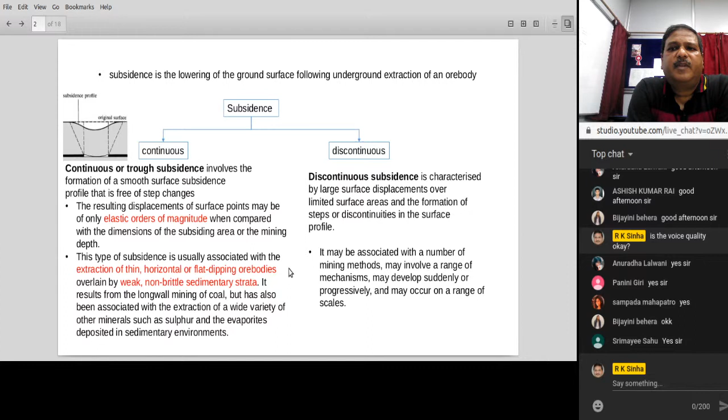That causes subsidence. So subsidence can be divided into two parts: one is continuous subsidence, and another is discontinuous subsidence.

Continuous subsidence occurs mostly in flat deposits, and the displacements are very less, sometimes in the elastic order of magnitude. Elastic order of magnitude means the subsidence up to the surface is showing a depression, but it is not breaking onto the surface, whereas underground it may have broken.

It is mostly associated with the extraction of thin horizontal or flat dipping ore bodies, which are overlain by weak, non-brittle sedimentary strata. On the other hand, discontinuous subsidence is a change in the...

It is characterized by large surface displacements over a limited surface area and the formation of steps or discontinuities in the surface profile. These kinds of discontinuous subsidence occur mainly in metalliferous mining deposits, where the deposits are almost vertical or subvertical.

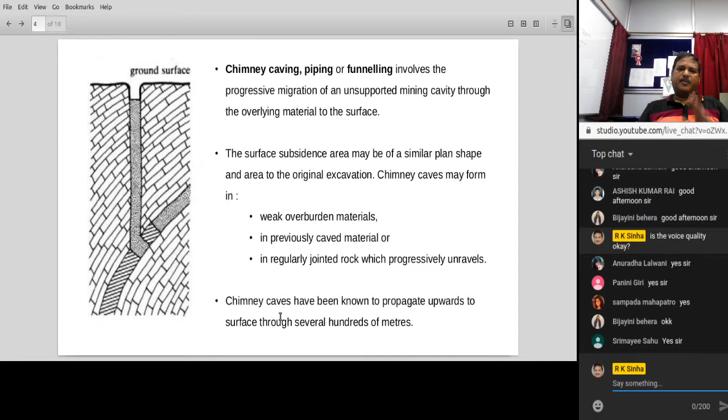Another kind of chimney subsidence is also known as plug subsidence. What happens is you have a mining deposit, you are mining at the bottom, and a certain portion of the strata is engulfed between two cross dikes. The moment you release the material from the bottom, this whole section can shift into the excavated area and come down just like a plug.

This type of subsidence is known as plug subsidence. One typical example is from Athens Mine in northern Michigan, where the cave developed and rapidly progressed to the surface through 600 meters of cover. In 1932 this plug caving occurred, and later people started monitoring it. After this dike issue there was no further subsidence there. This can typically happen when you get dikes in metalliferous deposits.

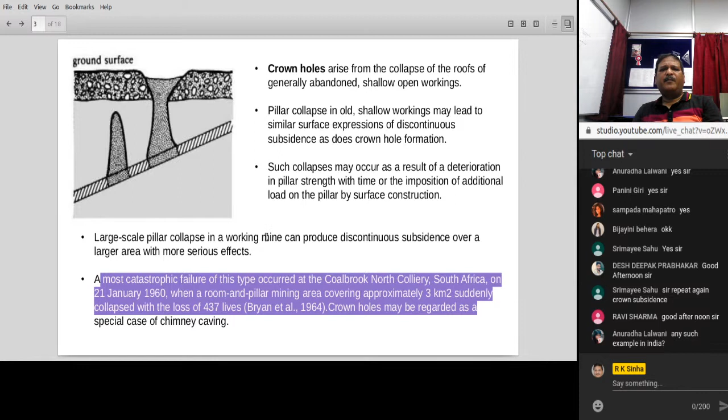One example is from Coalbrook North Colliery in South Africa, where room and pillar mining covering approximately 3 square kilometers suddenly collapsed with loss of 437 people. These can also be treated as a special case of chimney caving, because a certain weak zone of strata is involved. In Indian coal mines, you get a few crown hole type subsidence cases, termed pothole subsidence in the Indian scenario. Some 30 to 40 mines at shallow depth have reported this in India also.

When plug subsidence and crown pillar or chimney caving subsidence were being studied, a lot of research was carried out in 1994 by Bétourney, who reported the analysis between the stope span, rock mass cohesion, and factor of safety. The width of stope span is denoted by L. They came out with guidelines for the best span of the stope for a given factor of safety. For example, if your rock mass cohesion is 0.14 MPa, and you want a factor of safety against chimney caving of 1.5.

So from 1.5 you draw a horizontal line going up to the curve, and from there you drop a vertical line, so it comes out to be 10 meters. So a stope span of 10 meter width will be sufficient to prevent chimney caving against a factor of safety of 1.5.

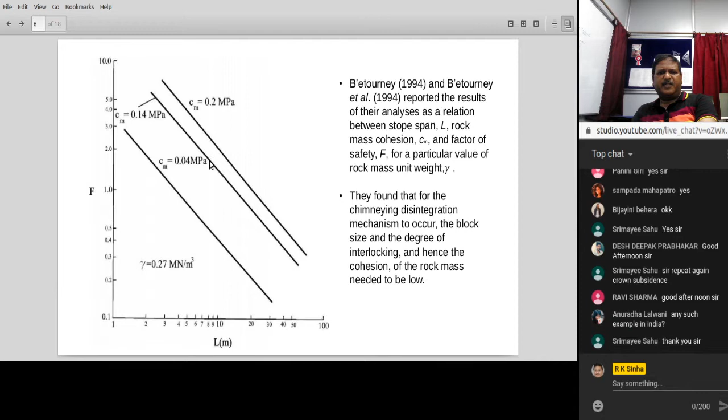But this relation has been developed for another country, for Michigan. So for Indian conditions these things need to be developed. So far there is no guideline, but it can be tried, and to some extent it can work in Indian conditions also. But a lot of research is required to develop this kind of curve.

Another kind of subsidence is sinkholes. Sinkholes are basically cavities known as solution cavities in limestone deposits. Because of acidic water, limestone gets dissolved and forms cavities. You may have a deposit, sometimes covered with alluvium, but underground or in between the strata you will find cavities, and this can break any time. One such big disaster that occurred due to a dolomite sinkhole was in the Far West Rand gold mining district in South Africa.

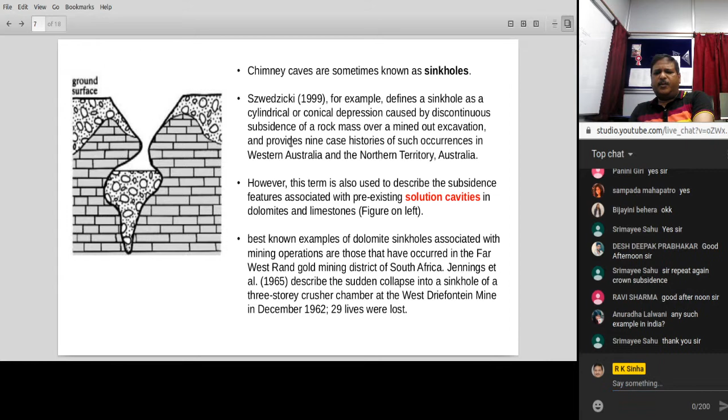They were trying to build a 3-story crusher chamber over the deposit, and suddenly the crusher chamber fell into the cavity, claiming 29 lives. This happened in 1962. So whenever you are working on dolomite or limestone deposits, it's always better to investigate any presence of cavities below the ground. This can be investigated through ground penetrating radars also. A lot of geophysical techniques are there, and with this it can be investigated. So sinkholes have these kind of issues.

Sometimes they are also known as karst, when a large volume of rocks are dissolved. They are also known as karst features.

Another example of discontinuous subsidence is caving, block caving. When the rock is very weak and fractured, mining is started by creating wide entries, and because of these wide entries the material automatically starts flowing out, and then the material is taken out through the stopes. Block caving has its own mining layout that I am not discussing, but the general look of block caving can be seen like something like this.

Once this fractured material, that is the mineral, is taken out, there will be caving on the ground surface. Here it is shown as a vertical deposit, but it can be inclined also, so there the subsidence will be quite different. And mostly in metal mines what people prefer is that they don't allow any habitation near the mineral body, because the subsidence is unpredictable there.

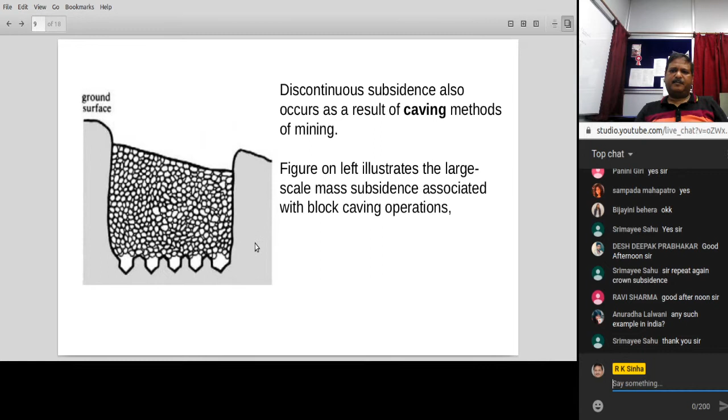As far as the mechanics of subsidence is concerned, suppose the material has been extracted from the extraction level, the material caves down, then there will be some fractures that may occur.

One important terminology with respect to subsidence: from the bottom of the seam up to the surface, if you draw a straight line, its inclination with respect to the horizontal is known as the angle of break, and with respect to the vertical is known as the angle of draw. That means the complement of the angle of break is also the angle of draw.

Sometimes even after the subsidence there will be progressive failure of the hanging wall, because this wall becomes vertical, suppose, then if all this material is withdrawn, this wall will be left free, and vertical walls normally tend to show failure. So apart from subsidence there can be progressive failure of the hanging wall also.

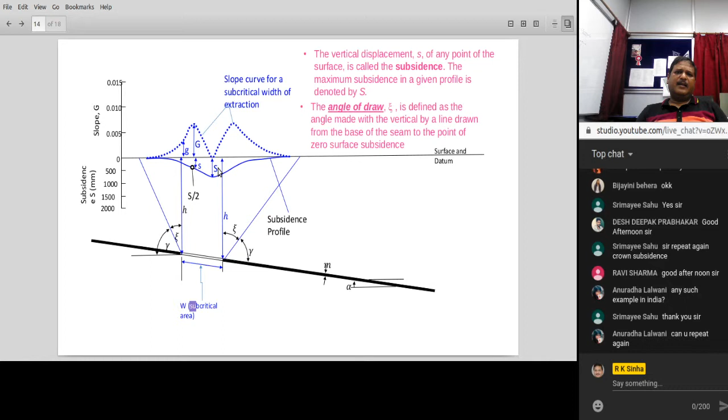The maximum depression is denoted by capital S, and half of the maximum subsidence is S by 2. This is a point of interest for many subsidence engineers, because the slope of the ground changes from convex to concave in this area. So it will be convex from the edge to half of the subsidence magnitude, and beyond half of the subsidence magnitude, up to the full subsidence magnitude, there will be a concave area.

Sir, there must always be some error associated with finding the point of zero subsidence. How is it taken care of?

The zero subsidence is taken care of by this angle, the angle of draw, which is actually a field dependent criteria. A lot of mining has been done, and a lot of studies on subsidence have been carried out. So people try to fit a plan of the mining area over this surface datum.

At this point you say that you have started the mining and the subsidence has extended up to this point. You know the depth of working, you know the width up to which it has extended. From that the value of xi, the angle of draw, is calculated.

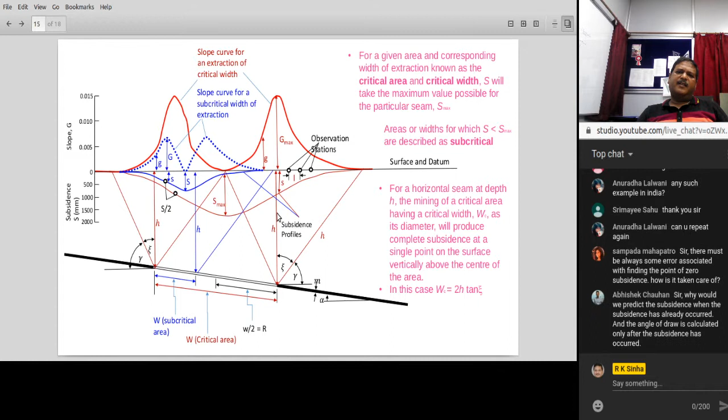Beyond this, if you go on excavating, this basin will have a flat surface, and then it will go on extending. So when the width of extraction is such that you get the maximum of S max, maximum subsidence, where it has become maximum of all, that is known as the critical width.

That is the red color one. So here you will get only one point which has maximum subsidence, and if you extend the extraction towards the right, this will go on getting horizontal, and then it picks up depending upon the angle xi. So here this basin will have a flat bottom for the supercritical area. The width of extraction in which you get only one point of maximum subsidence is known as the critical width. When you get a lot of points which have S max, that is known as supercritical, and below the value of the critical width is known as the subcritical width.

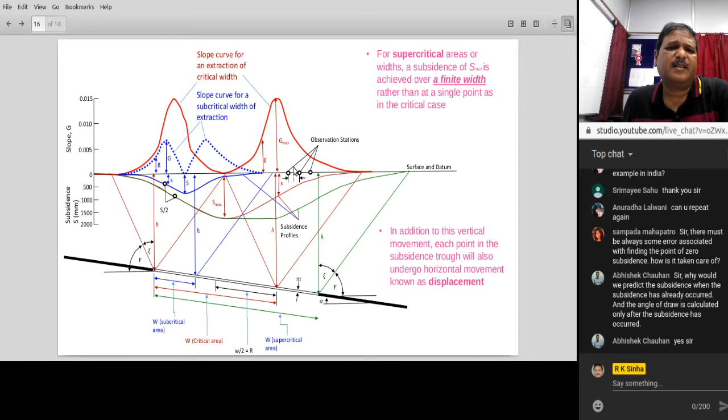These points are denoted here by a small s and their length L. These are the subsidence observation points which people normally observe on the mining area through surveying stations. These are the survey stations.

In addition to this vertical movement, each point in the subsidence will also go through horizontal movement known as displacement. Suppose this was the point here. This point can shift to another point as the mining progresses. So there is a change in the length as well as the direction of the point. With this change in length and direction, one can very well find out the direction of the strain, how the strains are behaving.

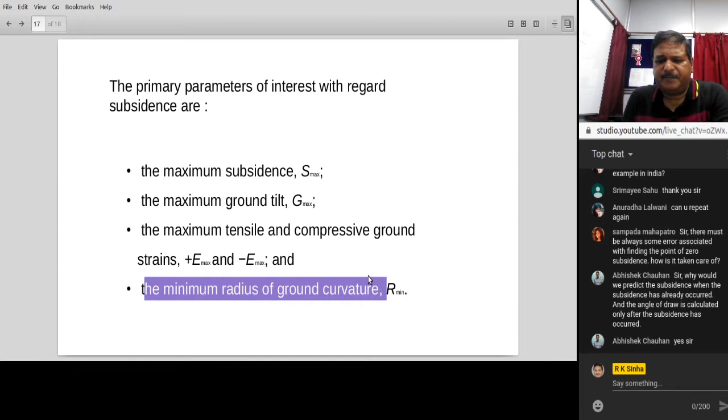So the primary parameters of interest with regard to subsidence are S max, the maximum subsidence value, the maximum ground tilt, the places where tensile and compressive strains are created in the ground, and the minimum radius of ground curvature, the curvature of the ground that is being created.

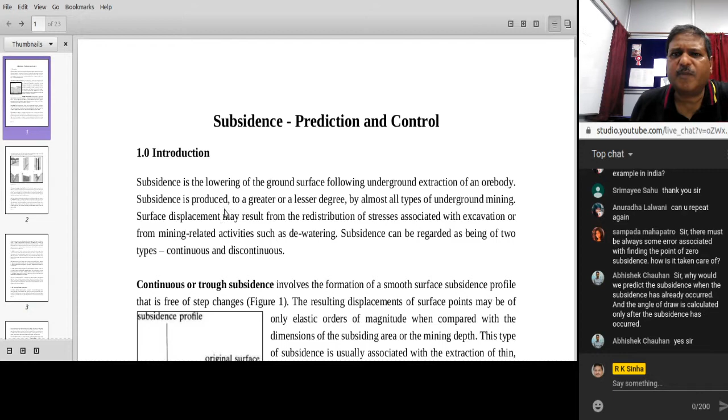Okay, so let us, with this background, I will just show you the lecture material which was already uploaded onto your MIS. I'll just quickly pass through this because most of the things have been discussed in the PPT. Continuous subsidence, discontinuous subsidence, pillar collapse - this we have discussed, chimney subsidence we have discussed, sinkholes discussed. The fundamentals we have discussed, and critical, subcritical, and all these things we have discussed.

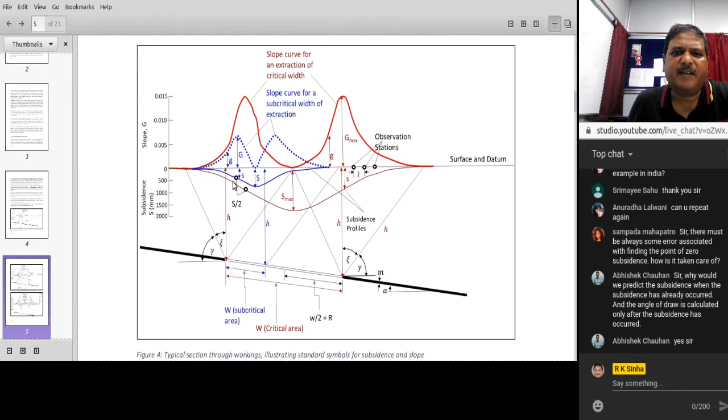So whatever we discussed in this previous slide, that is how the strains are measured. Strains can also be plotted along the subsidence profile curve. So here what you see is the blue curve is for the subcritical width of extraction, and the red curve and associated things are for the critical width of extraction. Okay, so we had discussed subsidence.

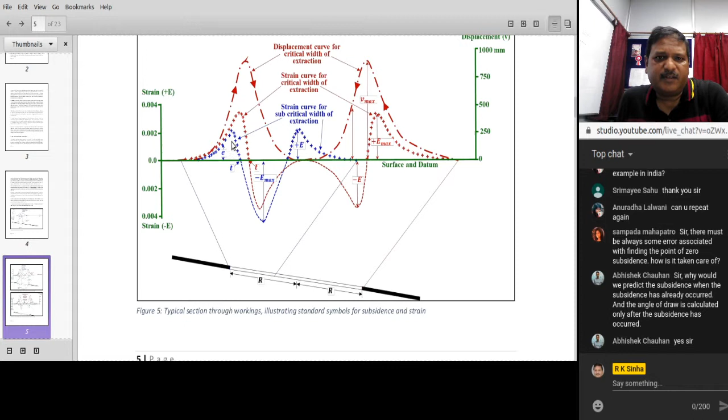For railway bridges and railway lines, they can tolerate a certain level of strain. If the strain goes beyond that limit, the bridge or the railway line will fail. So whether after mining the strain is within the permissible limit or beyond the permissible limit, that needs to be known, and for this the value of strains are required to be calculated.

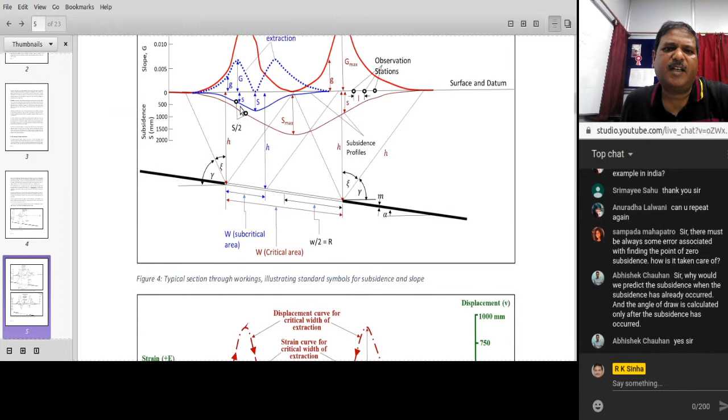Apart from this point, before reaching the critical place, it was here. After the critical extraction, it has gone here. So there will be a displacement in the xyz coordinate. That displacement curve can be plotted through these points. They behave in a similar manner to the strain curve, but slightly beyond the inflection point, on the right hand side.

Sir, if you could explain the strain curve. Strain is change in length per unit length. If the length increases more than the original length, the strain will be positive, shown by plus here. Beyond this point there will be compression - these are the compressive strains. That means here the length of two stations is decreasing compared to its original length, and in this region it is increasing.

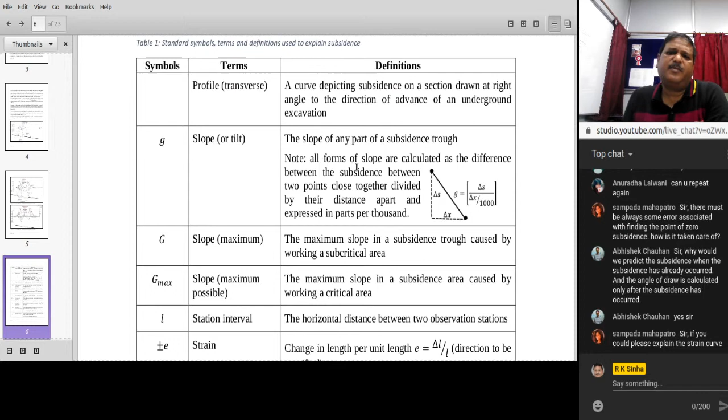Some of the symbols normally used in subsidence engineering are more or less standard and have been used by many people. Tilt or slope is defined by G, and the slope of that line is expressed in per thousand. So if this point has moved from this point to this point, the slope will be delta S by delta X divided by 1000.

So in terms of subsidence, the slope is always given in parts per thousand. Maximum slope is expressed by G. G max is the maximum possible slope occurring in the subsidence area, and G is the maximum slope when the working is subcritical. So you see the difference: when subcritical it is G, and in the critical area it is G max. In supercritical area, it will always be G max, because that is the maximum point you get - you get infinite number of points, whereas in critical area you get only one G max.

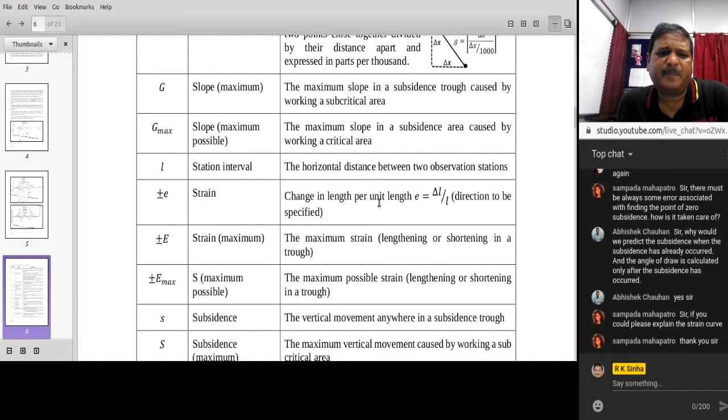That's the difference. Station intervals are denoted by L. Plus minus E is denoted by the strain. Maximum strain in the subcritical area is given by capital E, and E max is for the critical area. Lengthening is plus and shortening is minus.

Similarly for subsidence, at any point it is given by small s. Capital S is for subcritical and S max is for critical, and S by 2 is the subsidence half, which coincides with the transition point T, or the point of inflection.

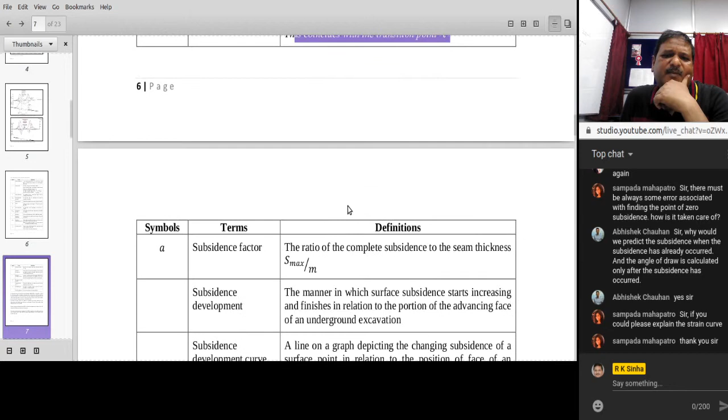One important ratio used in subsidence is the subsidence factor, denoted by A, which is the maximum subsidence in a critical area divided by the mining height. S max by M is known as the subsidence factor - an important term used in developing the graphical outputs. M is the mining thickness, and the transition point or point of inflection is denoted by T.

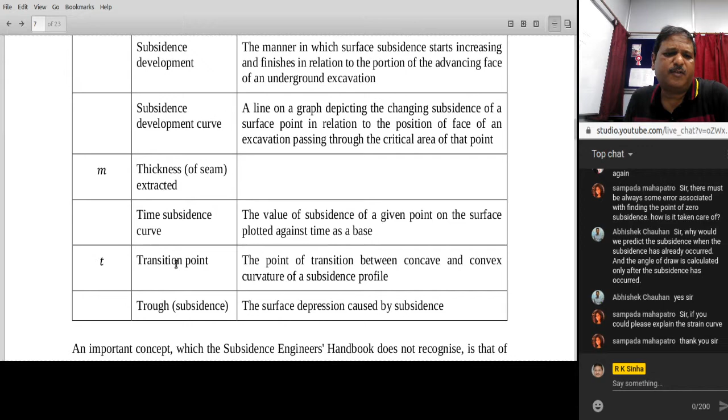Good work has been carried out in the Subsidence Engineers Handbook of UK. In the UK coal mining area, a lot of work was done in subsidence, and the UK people published this Subsidence Engineers Handbook, but there they missed one thing - the non-effective width of working.

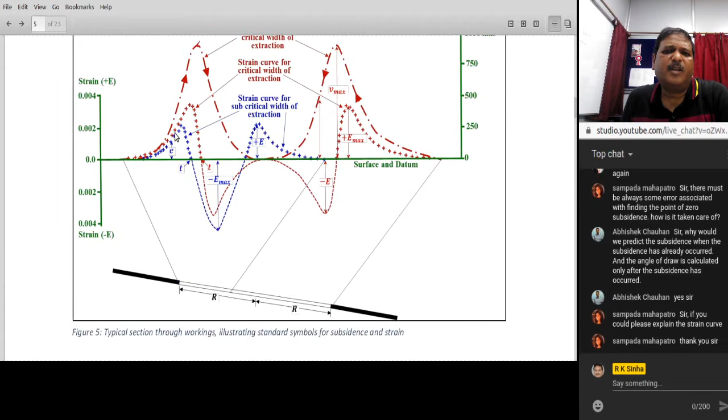Let us go back to the graph. If I extract a subcritical area, there will be subsidence. Now say for example, if I extract only 1 meter width of the working, and the height is 100 meters, is it going to create subsidence? No way. That means there has to be a minimum width beyond which subsidence will occur. That width up to which there is no subsidence observed on the surface is known as the non-effective width. So apart from the three widths - subcritical, critical, and supercritical - we now have one more term, the non-effective width, sometimes denoted by NEW. So coming back to that point.

Okay, so this concept was initiated in India and Australia during 1989.

Regarding the non-effective width, now the non-effective width to the depth ratio - depth of working, non-effective width of the working to the depth at which working is carried out - is denoted by NEW, and for Indian conditions it is found that it varies from 0.2 to 0.8, depending upon the strata competence. This is important data that can be utilized for finding the non-effective width in Indian coal fields. With this data, the critical width of extraction can be found to be 3.5 times the non-effective width in single seam cases, whereas when multiple seams are extracted, it can be 6.5 to 7 times the non-effective width.

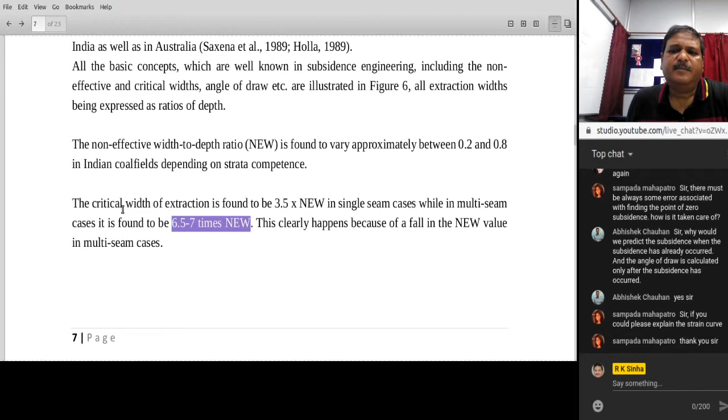The concept of non-effective width, critical width, is explained here. So you have an angle of draw, say theta, and non-effective width - for this much width there is no subsidence. Subcritical width: if you extract up to this much width, there will be a subsidence S, where S will be less than S max. You will have only one point of S max when the width is critical, and you will get multiple S max points in this trough when the width of extraction exceeds the supercritical width.

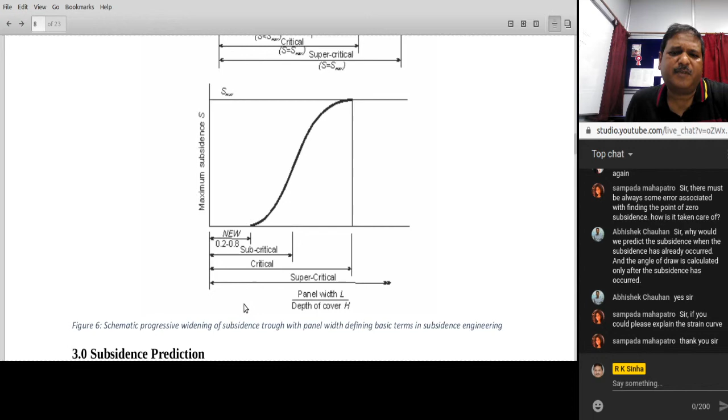This curve was drawn by Indian researchers just to show that the maximum subsidence value S will vary. It will not start from 0, it will start from here. So maximum subsidence is 0 up to the non-effective width, and then the maximum subsidence starts picking up as the width of excavation increases. A similar kind of graph you will see in the NCB book. So we'll come to that, how these are predicted.

For subsidence prediction there are three techniques: basically the empirical technique, the influence function technique, and the theoretical modeling. Empirical techniques are more popular because of the experience gained from large numbers of actual field measurements. People rely on these techniques because of this great thing, that is the experience. The influence function methods are based on propositions and mathematical assumptions to a great degree, whereas theoretical models are based on analytical or mechanistic theory, rheology of the material, and reaction to changing mining scenario. Mostly it is done using numerical modeling. So one is experience - the empirical technique, another is mathematical functions, and the numerical modeling. We'll discuss each of them briefly.

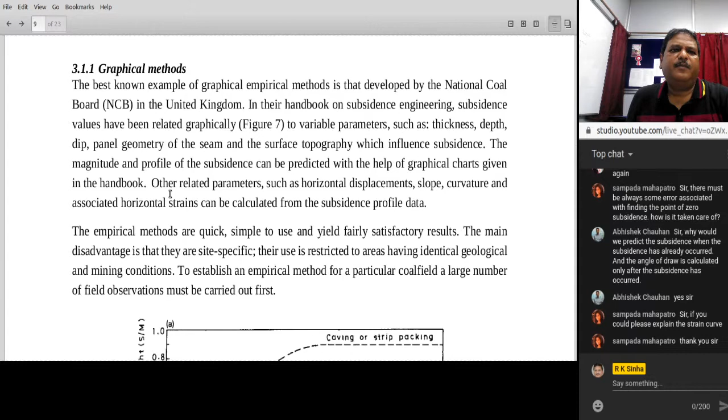So, empirical method: a graph was made by NCB, National Coal Board, in UK. This shows subsidence by extraction height, S max by M - the subsidence factor which we discussed in the definitions. This is the subsidence factor, which is the ratio of maximum subsidence to the extraction height, versus the width to depth ratio. These two are plotted, and you get a curve like this, based upon the lot of data that were available in the United Kingdom coal fields. So when stowing is carried out, the width to depth ratio and the subsidence factor shows this relationship.

Say for example, you want to know how to use this graph. Say you want to extract 300 meters at a depth of 300 meters, so the width to depth ratio becomes 1. If the mining height is say 3 meters, your subsidence factor turns out to be 0.4 for this much width of panel. That means 0.4 is maximum subsidence by 3. So your maximum subsidence will become: 0.4 equals S max by 3, so S max becomes 0.4 into 3, working out to about 1.2 meters. So you get a subsidence of 1.2 meters over that panel. This is how this curve has to be used when you are using stowing.

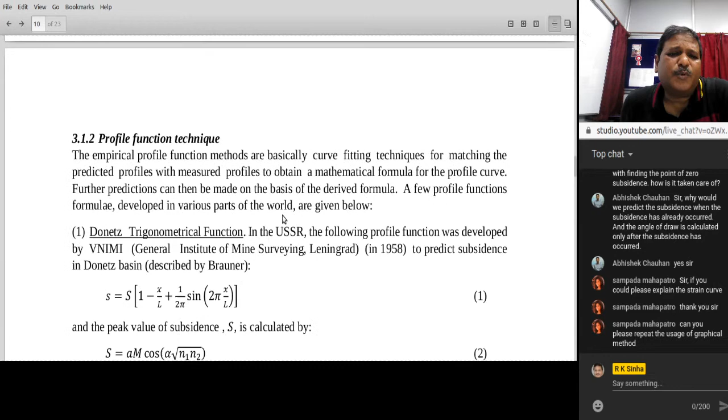Now these two graphs of the graphical technique are able to give you the value of maximum subsidence, but they are not able to tell you what is the profile. So people have used a lot of profile functions. I am not going into much detail on them.

The USSR function has been shown. You calculate S max from the graph, and then the S value at a given distance can be calculated and plotted, and you get the profile curve.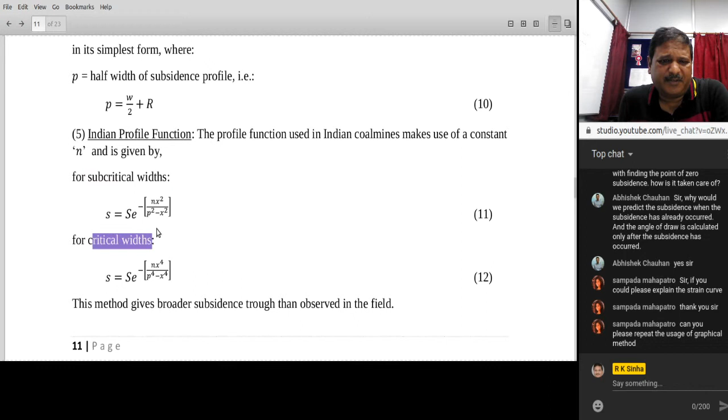Needhofer's profile function is there, and the Indian function is also given, but they separated it for two cases - one for subcritical widths and one for critical widths. The disadvantage of this Indian profile function is that it gives a broader subsidence trough than observed in the field.

Sampada asked: can you please repeat the usage of the graphical method? Okay, okay.

When you do coal mining, you extract the coal. Now, when you extract the coal, you can let the goaf fall into the void, or else sometimes people use sandstowing to fill the void in the goaf. Sandstowing is done so that the void created by extraction is not left as it is, and it should be filled up so that no roof fall takes place.

So if you don't want subsidence, you do stowing. But the problem with stowing is that you cannot ensure 100% packing in the goaf. At least 20 to 25 to 30% of void is left in the goaf, and because of that void you get subsidence on the surface.

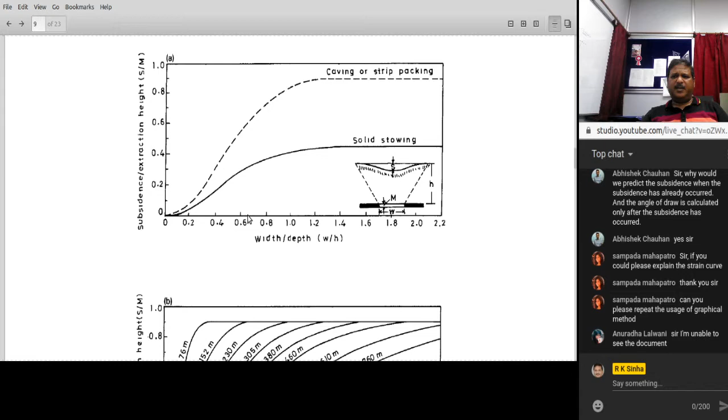So this is how you use this graph number 1. If you don't want to do stowing or filling, then you can leave the material in the goaf to fall, and that is known as the caving method of mining. So for different depths you have different curves. Say for example 760 meter you have this curve, 610 meter you have this curve.

Now if you know the width of extraction, say for example 300, let me take the previous example of 300 meter depth of working. So I draw a vertical line from here up to 305 meter of line, and I am getting 0.9. My subsidence factor is 0.9.

So 0.9 is equal to S by 3. Extraction height I'm assuming it as 3 meter. So 0.9 into 3 is 2.7. So for this case, with caving, my maximum subsidence will be around 2.7 meters. This is how you used to calculate it. I hope you will be able to understand this concept. Sampada, now is it clear?

Anuradha is telling, sir, I am unable to see the document. I have started on another computer, it is going on, and I'm able to see the document.

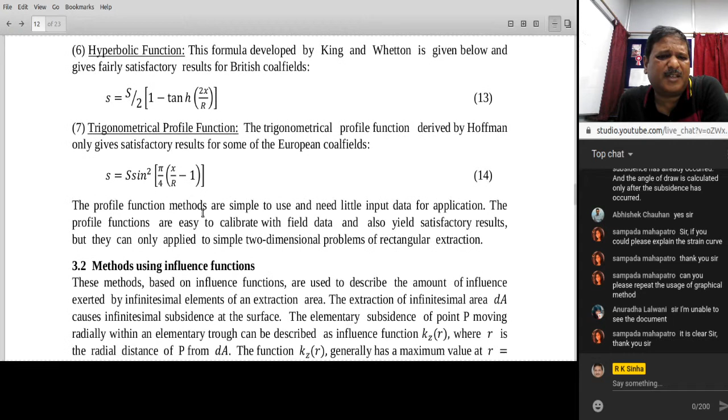So these profile functions methods have been used. Some people used hyperbolic functions, trigonometric functions. Lot of mathematical functions have been used. I have given only 6 or 7 of them.

Okay, another method is the use of influence. This method is still being used by consultants in our country to predict the subsidence, and using this influence method you can find the subsidence at any point in the subsidence profile. Please pay attention on this, and I will show you one example also so you will be able to understand how the things are calculated.

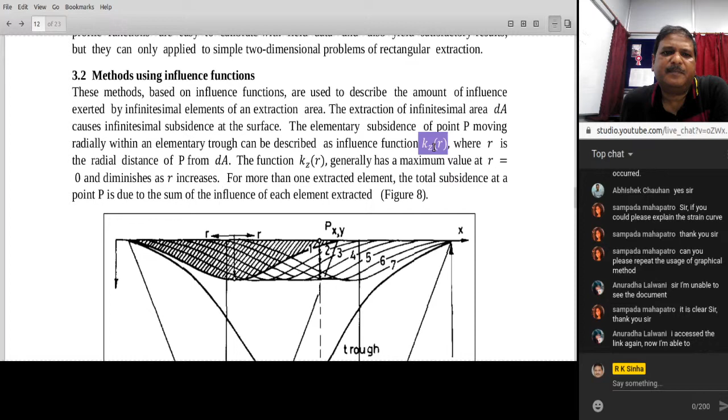This influence method is basically described by a function kz, which is a function of, okay, and it uses the fundamental concept of extraction of an infinitesimal area dA causing infinitesimal subsidence at the surface. See, the algorithm is very abstract, mathematical.

So you have to pay a little bit of attention, and in these online cases it becomes very difficult to see who is understanding or not. But anyway, put the things in your chat. So it relies on the cause of infinitesimal subsidence based on extraction of infinitesimal area dA.

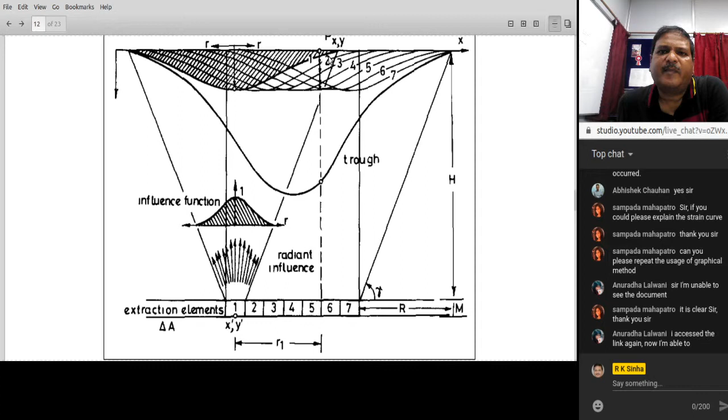Say for example this point P, you want to see the subsidence. What you do is, for this point P, find the influence of the extraction of element 1, element 2, element 3, element 4, element 5, element 6 and element 7 at this point, which can be found out by finding the total subsidence.

So the influence function kz is basically dependent on the element dA. Suppose one element dA I extract, so the function associated with this is something like a probability distribution curve, which has a maximum value at the center of the element and goes on reducing. So when I apply this function and integrate it throughout, I get a curve for element 1. So for element 1, if I extract this element, the subsidence profile will be something like curve 1. When I extract element 2, I get a subsidence curve like this too, using this influence function.

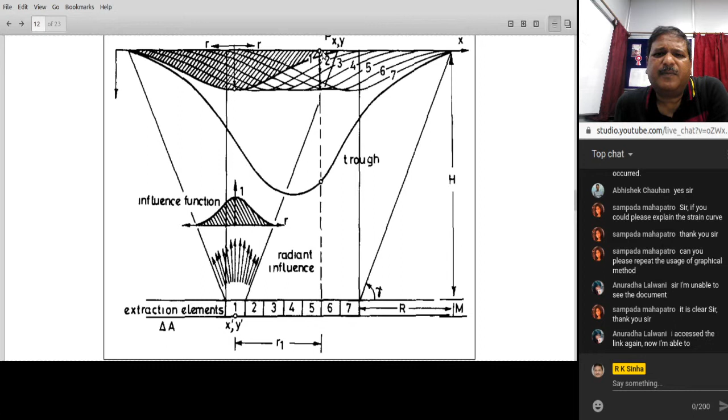So all these 7 elements, I got 7 curves. When I add all the subsidence values at this point, I get a point here. Similarly, I go on adding the subsidence value of all the curves, and at this maximum point, the subsidence value of all these things will be 7 times, because 7 curves are there, so I get a maximum curve. So this is the overall curve I am getting because of extracting all these elements.

This will be more clear as I expose you to a numerical example. So the subsidence, to do it for the complete area, you have to integrate along that area using an infinitesimal and the influence function, so you get a maximum subsidence.

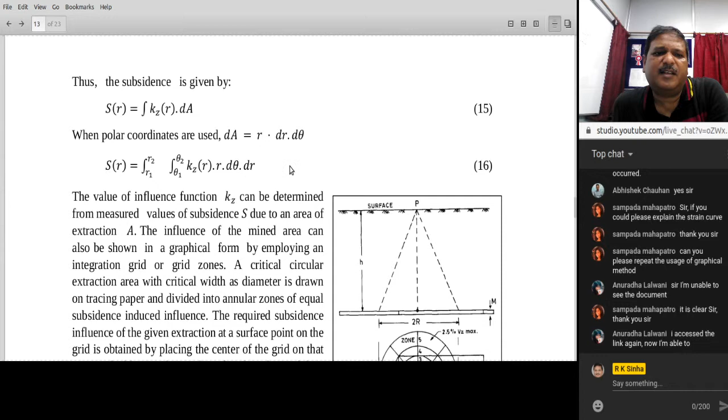Okay, when you are using the xyz coordinates, and when you use the polar coordinates, the function kz(r), r dr dtheta, dtheta dr can be used. This way you can find out. Okay, let me say one more thing.

Say for example, on the same, little simplification of the above concept, here it is shown like this. Say for example, I extract this much width, a width which is smaller than this area, and at the center of this point P, I need to know the subsidence. What I do is, I extract one annular ring, get an influence function, then extract the second annular ring, get its influence function, and when I add all these things at this point P, the complete subsidence can be found. Some of the influence functions that have been used are these functions.

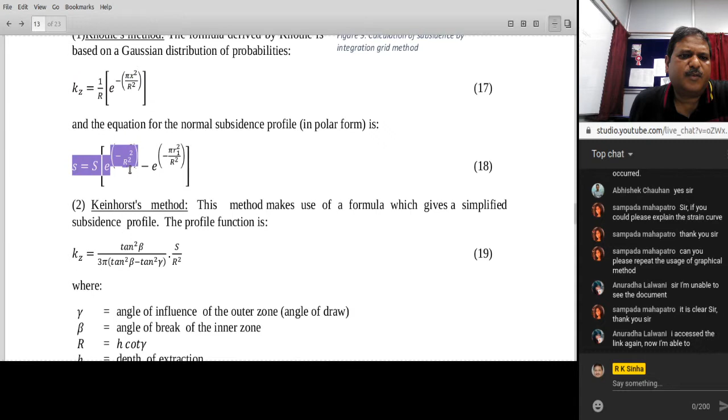These two functions - Keinhorst gave another function, Ball gave another, Bayer gave another function. From different countries, people have given different formulations. In India, the Sheorey's influence function, the kz function, is given by 0.5352 by R square into 1 plus cos pi r by R.

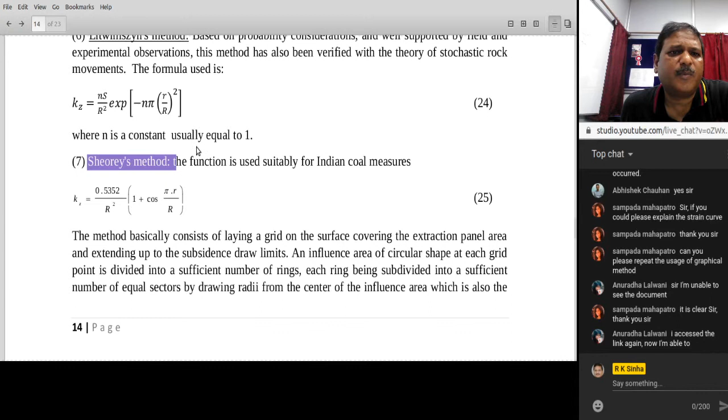So this concept, how it is utilized, I'll show you a numerical example that will make it clearer to you. Let me open the numerical example. Anuradha, are you able to see it, okay? So we try to understand the concept of influence function through an example. This was there in one of the exams, last year's exams for BTech.

It says that a coal seam of 3.5 meter thickness is worked at a depth of 357 meters in conjunction with caving of the overlying strata. The subsidence history of the mine reveals that the angle of draw is 35 degrees - you need to know this from the subsidence history. And the subsidence factor of the mining area is 0.81. Here, NCB has not been used; rather, directly the subsidence factor has been shown to be 0.81.

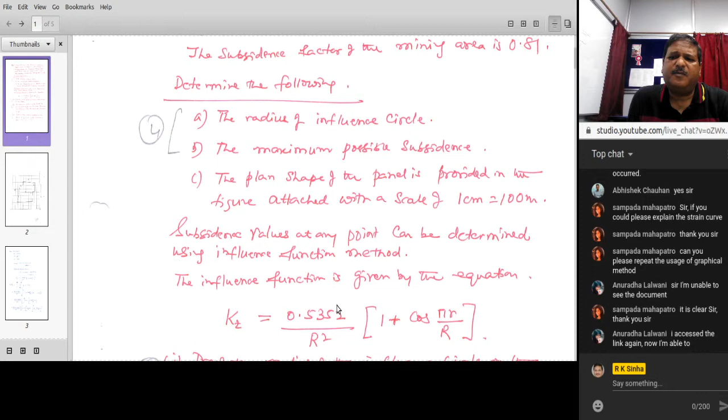Now the question asks to determine the following: the radius of the influence circle, the maximum possible subsidence. The plan is given in the figure attached with a scale of 1 cm = 100 m. Subsidence values at any point can be determined using the influence function method. The influence function is given by this equation - it is basically the Sheorey's influence function.

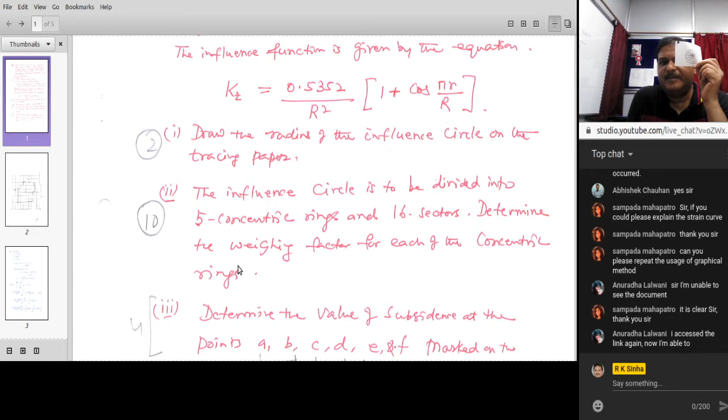The first step is you have to draw the radius of the influence circle on a tracing paper, right? Something like this. And then you have to divide it into 5 concentric rings, equal rings, 5 equal concentric rings, and there should be 16 sectors. So we need to find the weighing factor for each of the concentric rings, and then we have to find out the maximum subsidence.

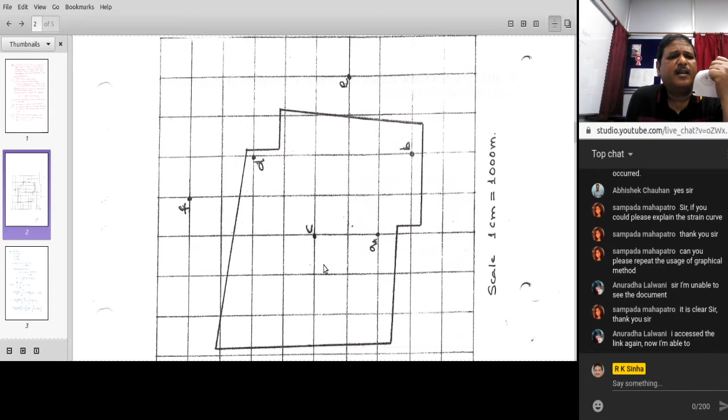So how is this to be done? This is the plan view of the panel being extracted by board and pillar mining. You need to know beyond point E what is the subsidence, at point F what is the subsidence, and just above the panel what is the subsidence. So all these places will have different values of subsidence. If you know the algorithm to calculate the subsidence at one point, you have to calculate it at all points, and if you calculate at all the points, you can very well draw the contours of the subsidence basin. This was just for exam purposes, and most of the students did it.

So with the given data of the question, your mining height is 3.5 meter, depth of working is 357 meter, alpha is 35, and subsidence factor is 0.81. So S max will be A times M, which is 2.83. That means the maximum subsidence which you will get is 2.83 meters in the basin. That is one data that has been taken out.

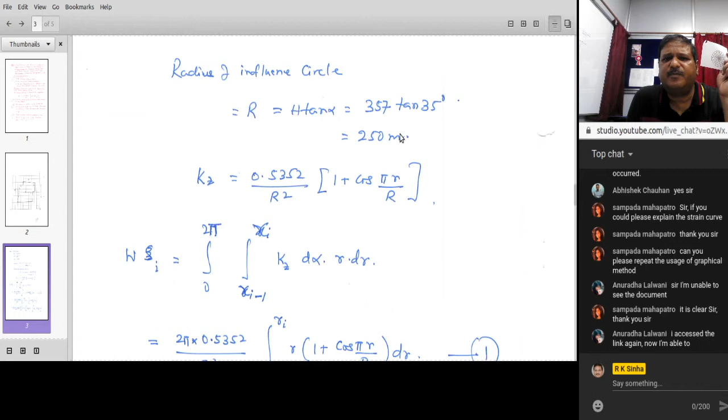Now you need to draw the radius of the influence circle. This radius of the influence circle is nothing but h times tan alpha, which turns out to be 250 meters, because h is 357 meters, and the angle of draw is 35 degrees. And you have to use this kz function. Now in this concentric ring, say for example, are you able to see these concentric rings? This way you have to draw, and the radius has to be scaled to 250 meters.

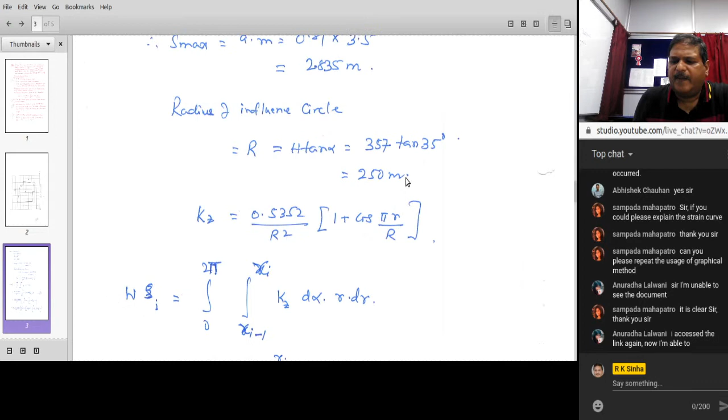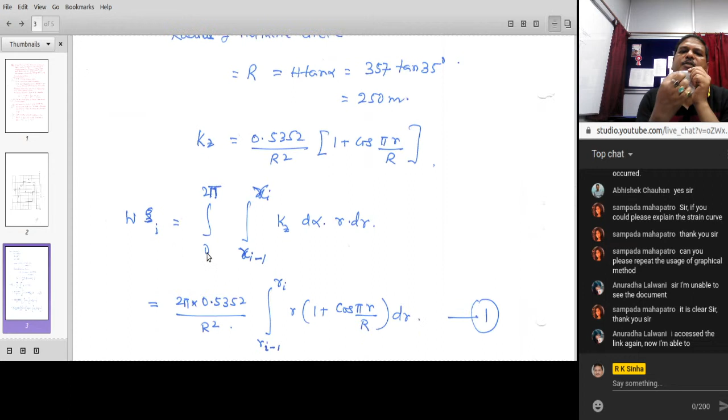Then kz d alpha r dr, and this theta will vary from 0 to 2 pi. Radius for the first influence circle will be 0 to 50 meters, because the complete circle is 250 meters, divided into 5 equal circular areas. So if I extract the central annulus, the influence weight will be integrated over 0 to 2 pi, and r will be integrated from 0 to 50 meters, using the function kz. These constants will be taken out: r into 1 plus cos pi r by R, this will be there. And then you can integrate it.

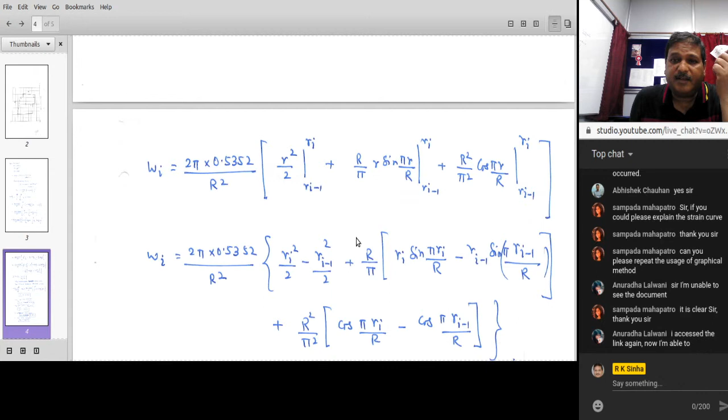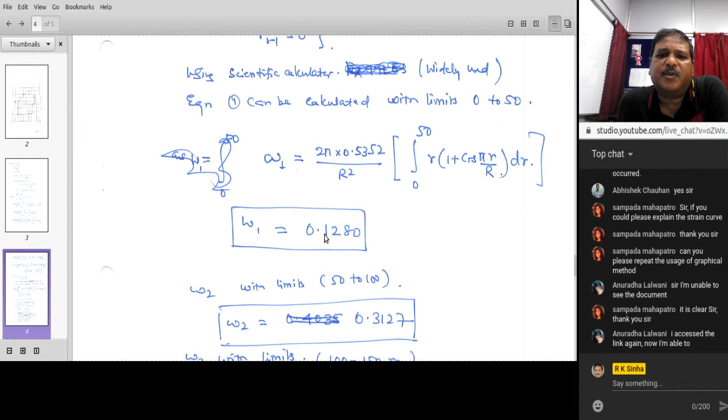Finally, using manual integration, you can find out for the first ring, r minus 1 is 0 and r is 50, that turns out to be 0.1280. If your calculator is not that smart, you have to calculate it manually, or else with smart calculators you can directly find the integral using this function, and for the first ring you get 0.1280. So if I extract the first ring, the weighing factor is 0.12.

For the second ring, similarly with limits 50 to 100 meters, that turns out to be 0.3127 - the same integral, you just need to change the limits. Third is 0.32, fourth similarly you get 0.1929, and fifth one you get 0.0369.

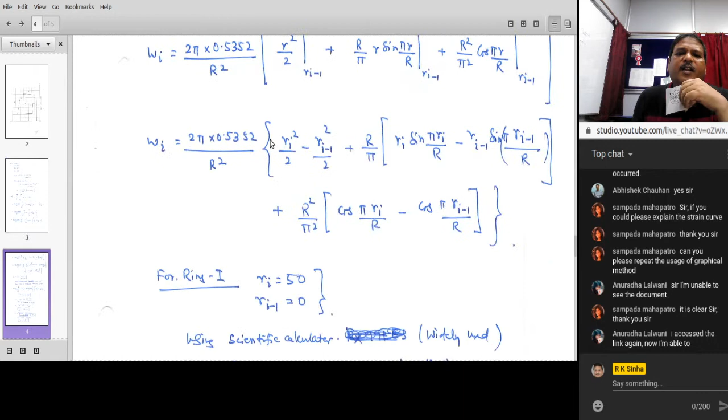When you add all these five weightages - 1, 2, 3, 4 and 5 - you can cross check this integral, it is there in the theory. All this sum will be unity, so this way you can also cross check that this has to be unity.

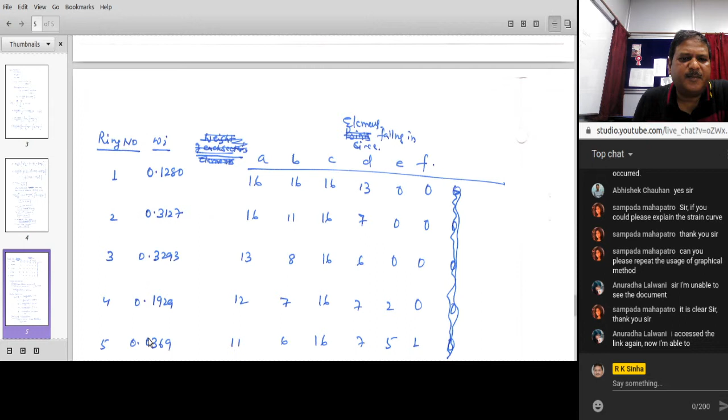When you draw these circles, for ring 1 your weightage is 0.128, ring 2 you go on making a table like this for the weights. Now the second work is...

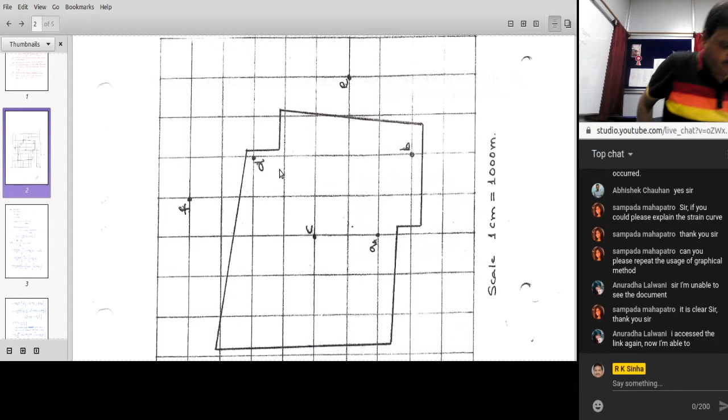On this plan you superimpose this circle. Say for example you are placing the center of this circle over point A - the center of the circle coincides with point A. You have to coincide it like this.

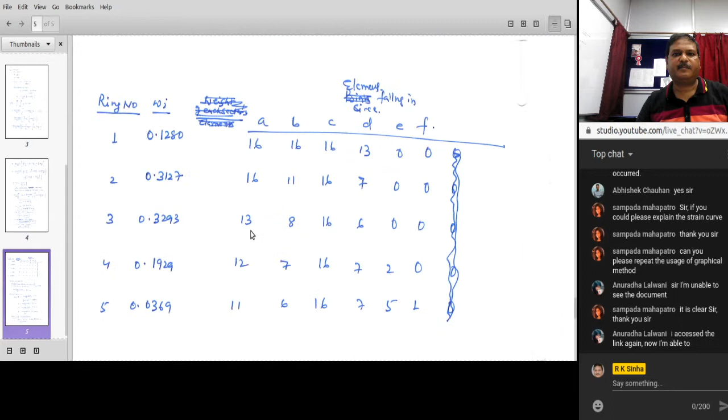In the first ring you have to count how many of them are falling inside the extraction area. So obviously for point A, all sectors are falling in the extraction area, and similarly for the second ring, again all 16 are falling in the extraction area. Here in the third ring, 3 are not falling in the extraction area, they are outside; 13 are inside the extraction area. Fourth ring, 12 are inside the extraction area, 11 are there in the extraction area.

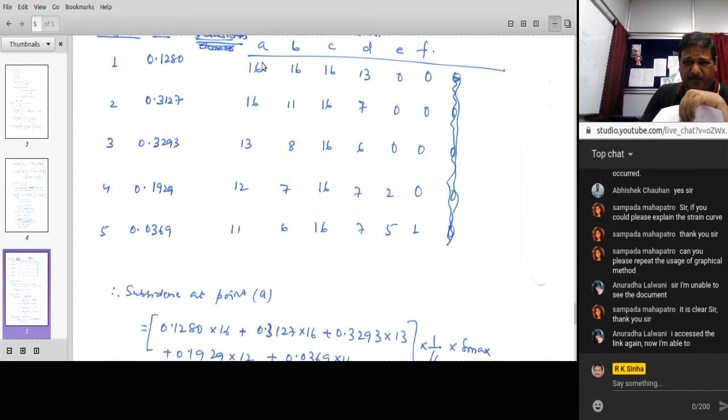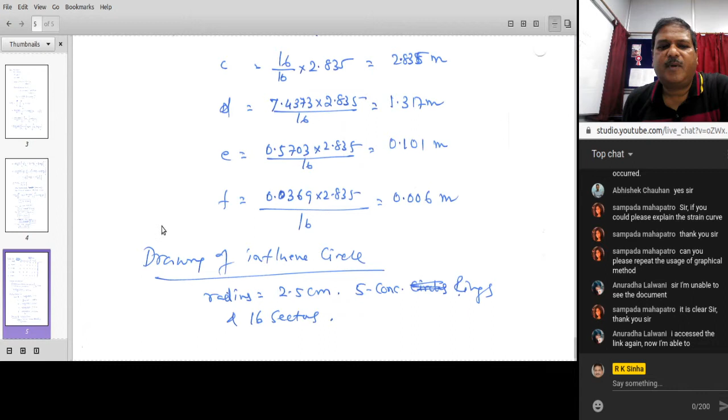And then we divide it by 16 and multiply with S max. That means 16 of them have contributed - the 16 elements of the first ring, having a weight of this much, has contributed towards the maximum subsidence. So that would be 2.835 meters. Similarly, subsidence at point B, C, D, E and F can be calculated. So this is how the algorithm for calculating subsidence works.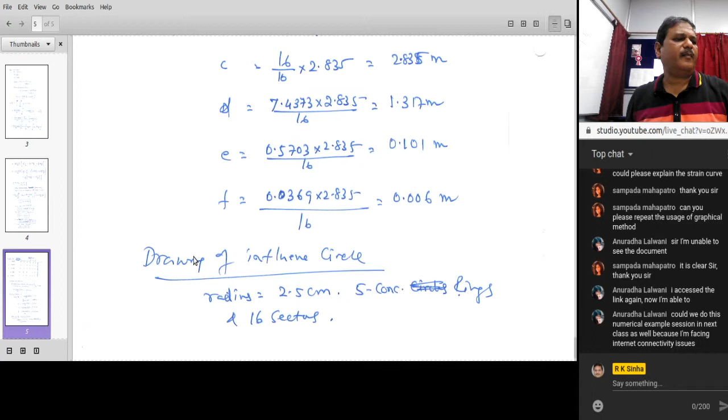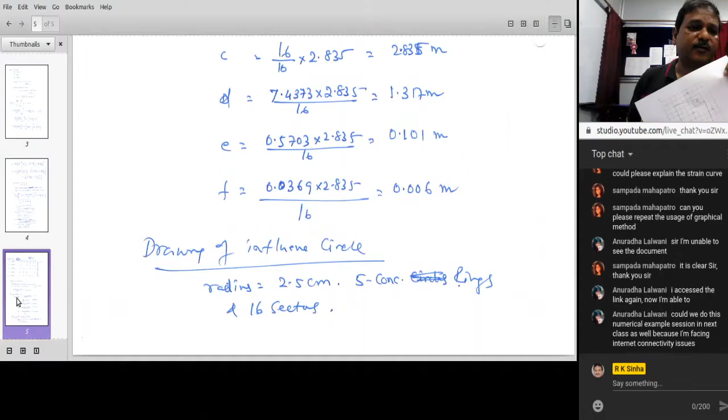So this is the way this is related, and one good example of application could be - suppose a railway line is crossing through point F from here. Now this point F is outside the mining lease area, but when the complete panel is extracted, whether the subsidence is enough to create damage to the railway line, how do we know? That can be found out using this influence function method. So this is the application, and once you exercise it, you will be able to do it.

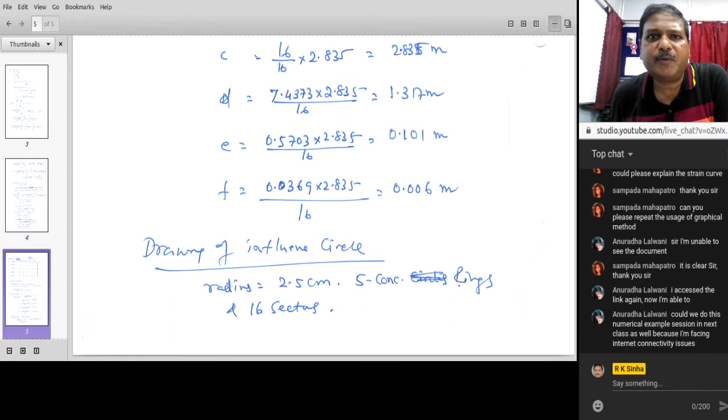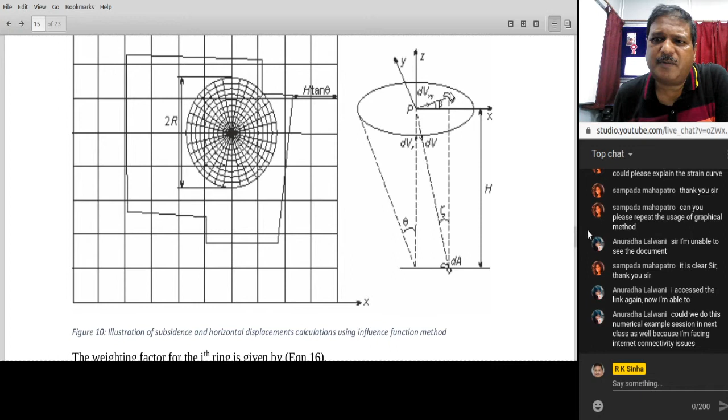Okay, so that algorithm was for finding out the maximum subsidence. The same algorithm has been applied for finding out the displacement. So for this, they take one element, find the subsidence, that is the vertical displacement because of extraction of only this one element in the annular ring. It is assumed that because of this there will be a displacement towards the center, dictated by angle beta. In the plane it will be tan ξ into dVz, where dvz is the vertical displacement.

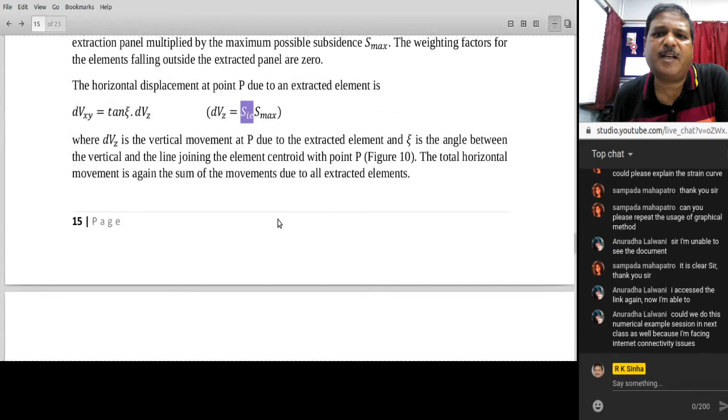Dvz is calculated using the subsidence factor or weight from that integral method into S max. You find the vertical displacement, and tan ξ will give you the xy displacement, and using the angle beta, the direction of movement in the xy plane can be calculated. Using a computerized method, all these elements and vector displacements are calculated and summed to find, at point P, the direction of the displacement. This is how the displacement is found out. Doing such hectic tasks has to be computerized, so a computerized solution is available.

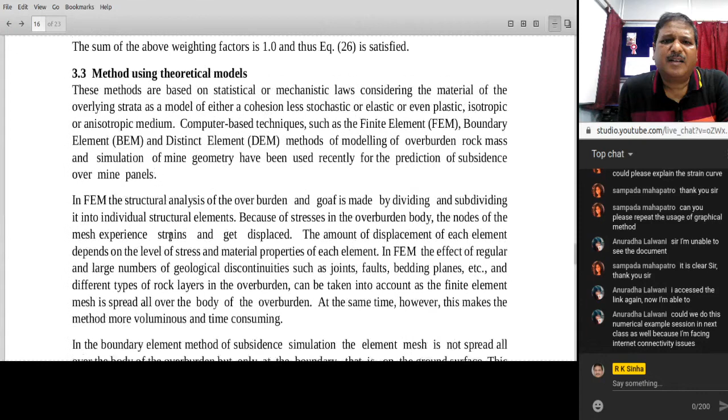Theoretical methods rely on finite element and distinct element methods, but not much confidence has been built up with these models. Rather, this influence function gives more confidence in the subsidence prediction. People are working on extracting the mineral partially underground, and this method of partial extraction is known as the partial extraction method.

There are six methods that utilize the non-effective width approach: the chessboard method, goaf pillar method, pillar thinning and heightening, splitting of pillars and stowing, and splitting of pillars and side bolting.

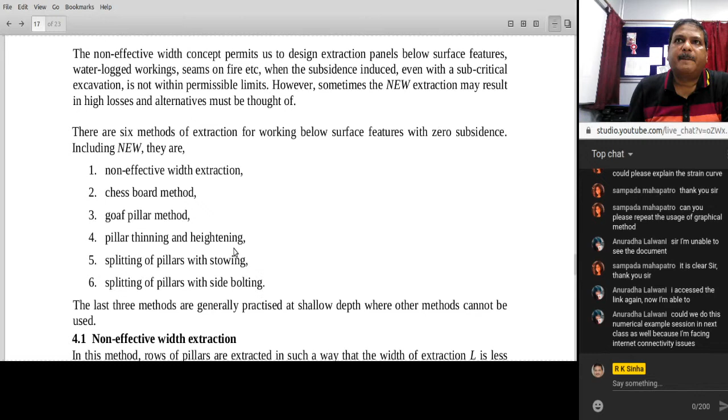In this, the width of extraction is kept as L. If L is the width of my extraction, I have to decide that L should always be less than the non-effective width of working. The moment it is less than the non-effective width of working, there will be no subsidence. Pillars left in between the panel should have a factor of safety of at least 2.

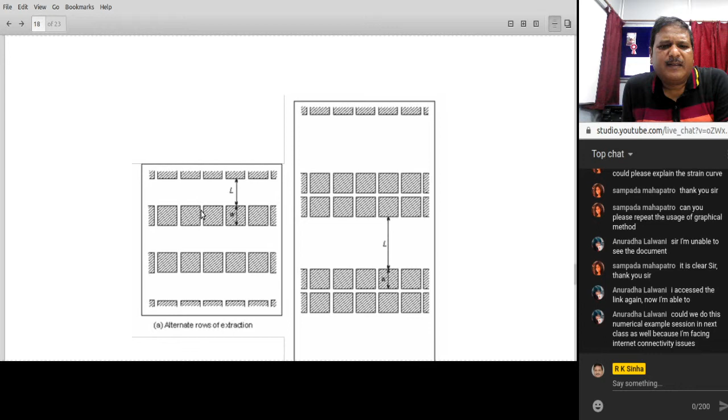So if I take my mineral in gaps of L, which is less than the non-effective width of working, and leave pillars which have a factor of safety more than 2, this will not create subsidence over the surface. These are the methods of work. You can utilize the chessboard pattern of extraction: leave one pillar in the row, leave one in the other column, and you get a chessboard pattern, where the effective width of working can be L.

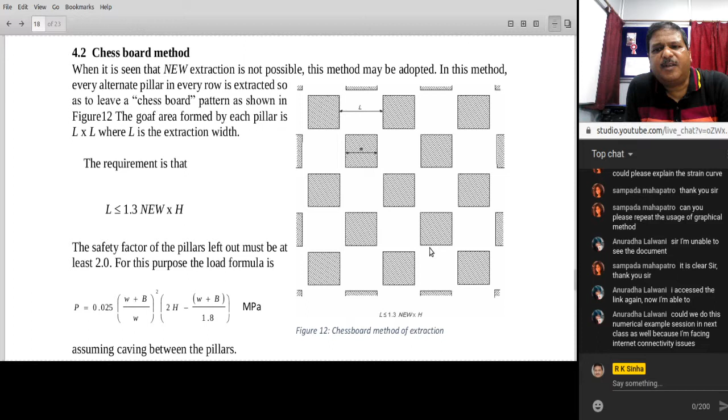That way the non-effective width of working is satisfied, and the subsidence is prevented. Now you also need to ensure that the factor of safety of all these pillars is more than 2. For that, instead of using a tributary area method, a different approach has to be used to get the load on the pillar formula, and then find the factor of safety using the strength criteria.

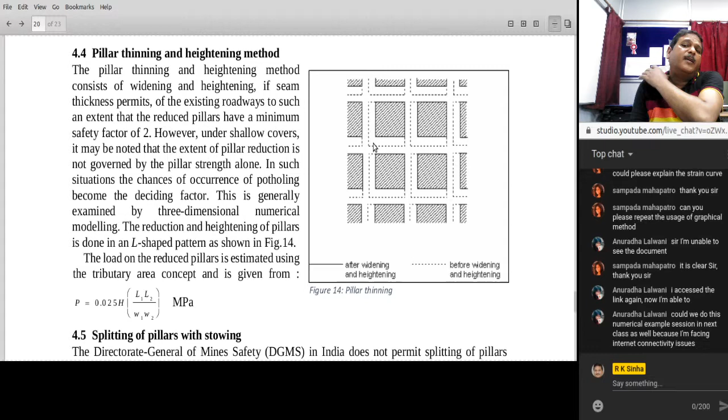In the goaf pillar method, you can leave 2 pillars such that L is the non-effective width of working. 4 pillars can also be kept, but throughout, L has to be less than NEW on all 4 sides. Pillar thinning and heightening can be done, with sidewise pillars extracted so that the subsidence doesn't approach the surface.

Pillar splitting and stowing can be practiced: a pillar can be split into 4 parts and stowed. When stowing is not possible, pillars can be left and then stitched together to get greater factor of safety.

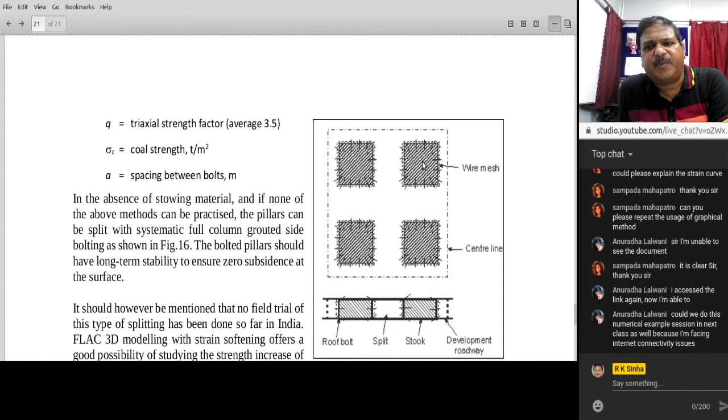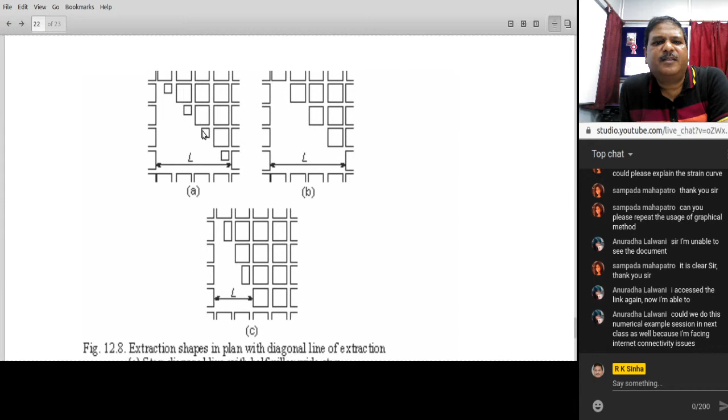In some panels, you do not always have a clear cut rectangular shape. When a diagonal line is extracted in a panel, if this is L, the effective width has to be less than L, so that factor has to be utilized. This is a step diagonal line, a step diagonal line with half step, or you leave L like this.

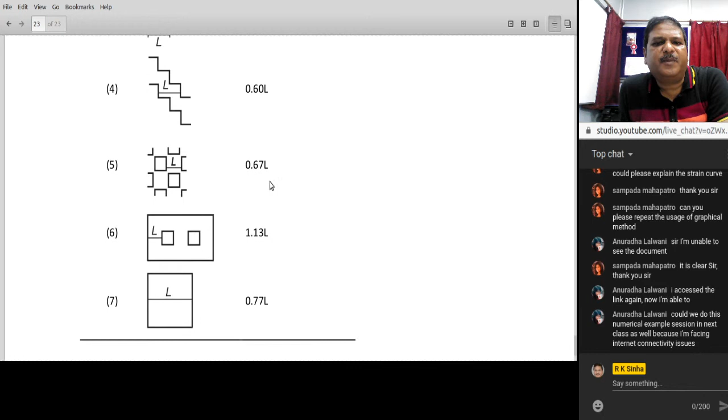For such cases, the effective equivalent width will be: for the step diagonal system it is 0.54, steep diagonal 0.57, another pattern 0.7, this pattern 0.6, and chessboard pattern 0.67. This will be the effective width that can be utilized in the formulation.

Subsidence prediction strategy - this completes the part. If you have any doubts, if you have some more doubts, you can ask.